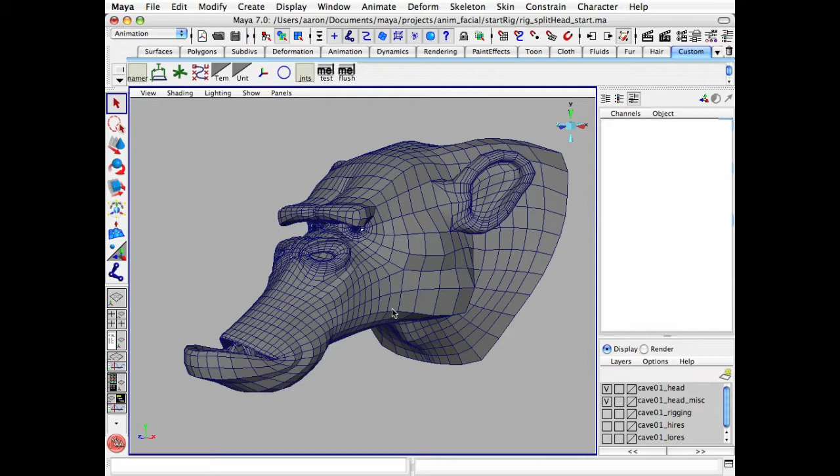So now we're going to create a series of base joints for this head rig. What I mean by that is that these joints would be used in the face rig regardless of the primary deformation system. Whether we're going to rig this face using direct controls in the face, or if we're going to rig it using blend shapes, there are a certain number of joints I'm going to use in the face to give it an underlying structure or underlying level of deformation.

What these are going to be are jaw and lip joints. For the lower jaw, lower lips, I'm going to have a series of upper lip joints so I can get some basic curling. And I'm going to have a couple of head pivots as well.

Let's switch to a side view here. Change this to template mode. I'm going to use some NURBS curves to sort of draw some guides here.

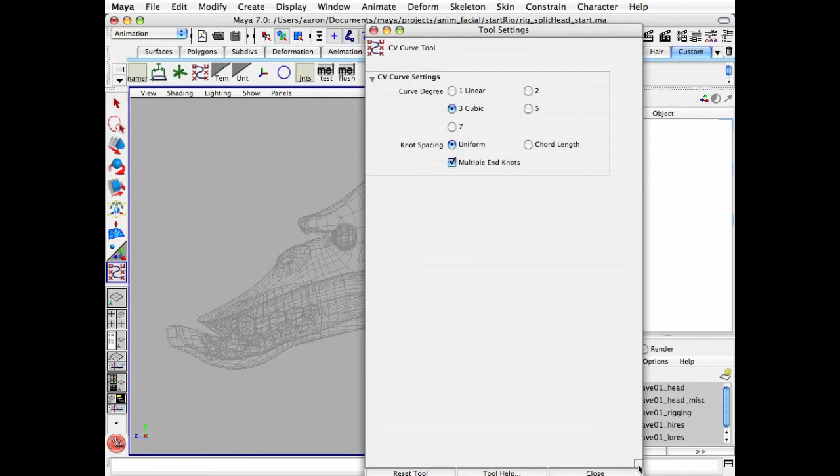Okay, so create, CV curve tool. Let's reset this. So I'm going to use a linear curve. I'm going to start at the base of the ear. Draw our first jaw joint. Rather than having a single jaw joint, since this is such a long area, I'm going to split this into a number of joints here.

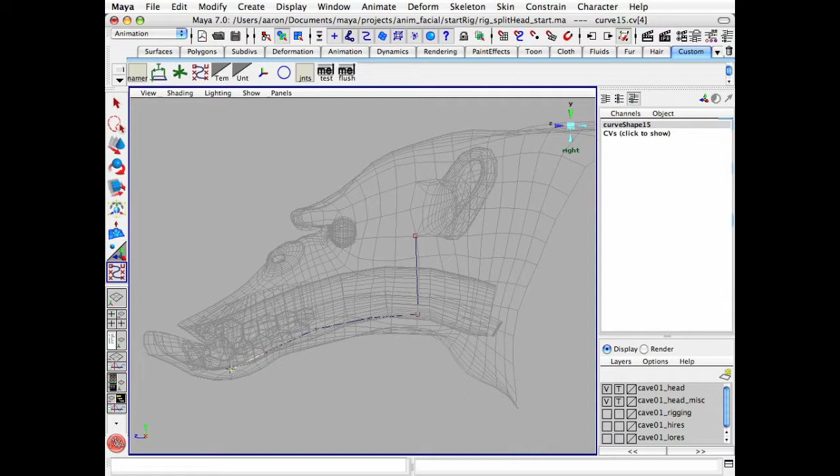Once again, I'm drawing pretty fast and loose here because I know I can go in and edit this later. Okay, so that's what I have. And next I'm going to draw a series of joints for the lip.

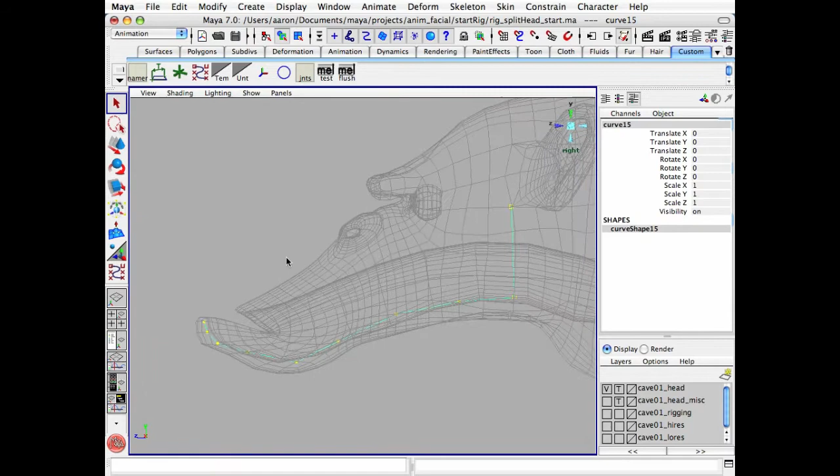These joints get more and more granular as I get to the lips, since we'll need more fine deformation toward the end of the lips here, since there will be a lot of curl in that area. Let's display our CVs. Now go into component mode and start to be a little more precise with these positionings.

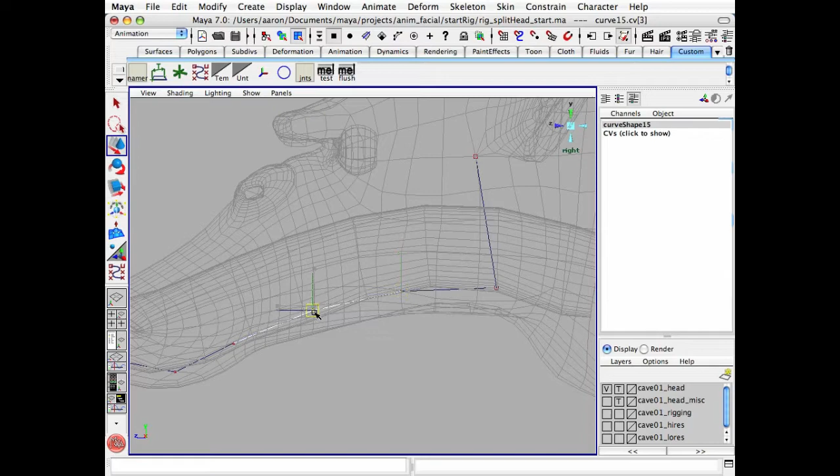Once again, rather than having a single joint, this is a pretty large lower jaw area, so I'm going to split it to give it a little more range of deformation. Once again, I got more granular as I got toward the edge of the lips.

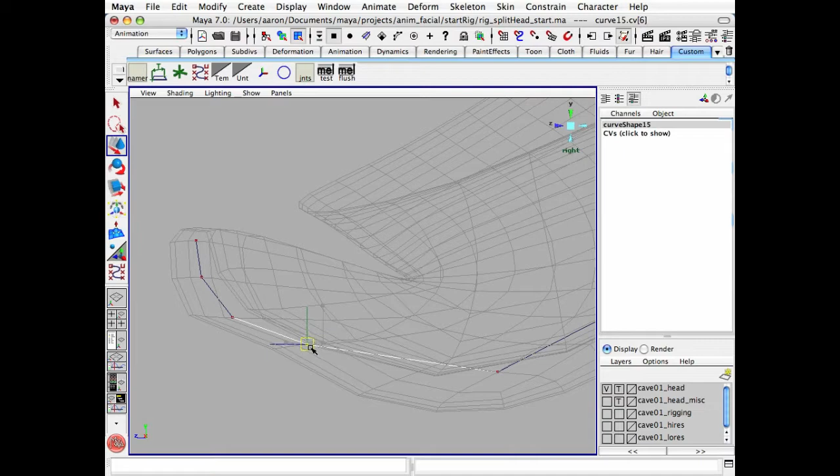Okay, I'm going to quickly name this low jaw so I'll know what it is.

I'm going to draw a similar curve starting at the bridge of the nose and going down to the end of the upper lips.

So I'm not going to have much deformation in this area. If I were, I'd just split this in two, having a joint there, having a joint here, but I'm going to keep this pretty solid for this character.

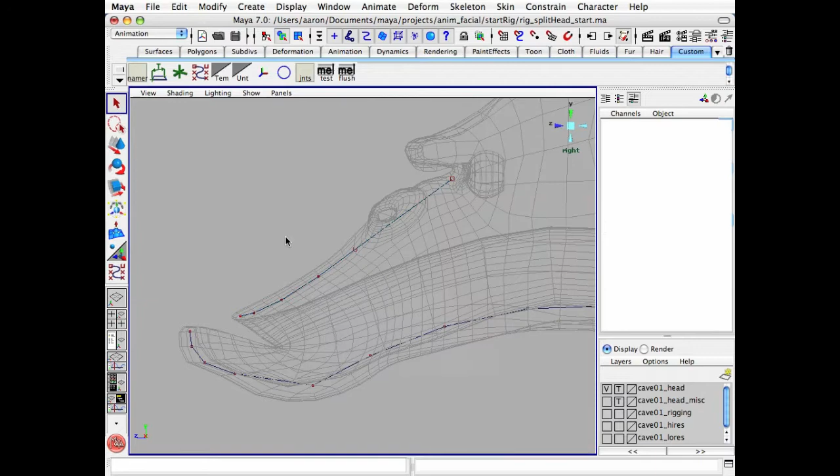Okay, display our CVs, switch to component mode. Once again, go in and refine a bit more.

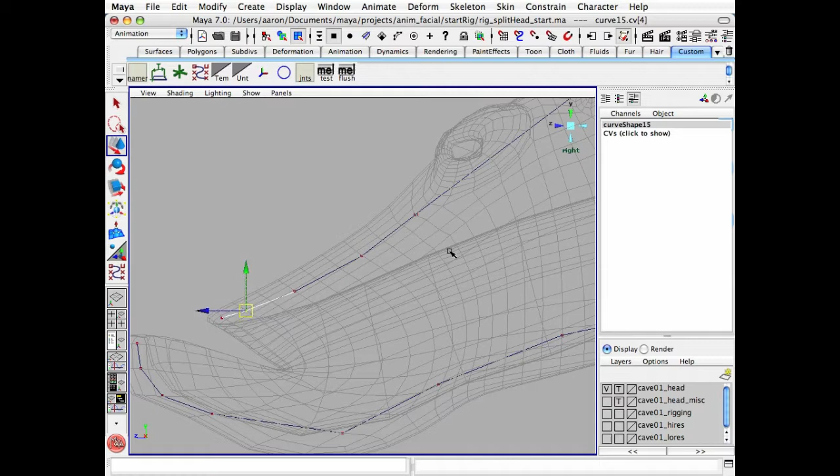We can see this cavity here, particularly toward the end. I'm trying to keep it more or less toward the center of this cavity.

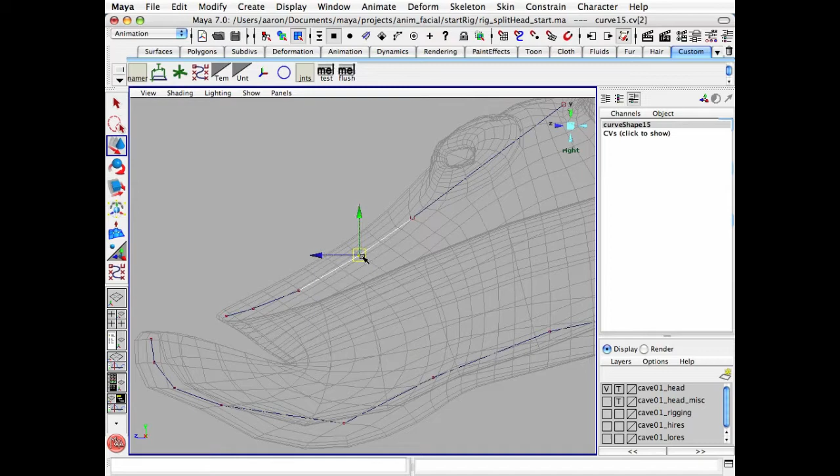Quickly rename this, just for clarity later on down the road.

Okay, so now I have my lower jaw and lip guides as well as my upper jaw and lip guides. I'm going to create 3 head pivots.

At the base of the ear, I'm going to create the main head joint, which will be a parent of both the lower jaw and the upper jaw. But the upper jaw will be a child of another joint, which will have its pivot in the same location.

And then on top of all that, we're going to have another pivot at the base of the skull, so that when he rocks his head back, we can rock it back from a pivot closer to where the base of the skull and spine would be.

On a human, they actually run pretty close to the surface of the back. I mean, you can feel your vertebrae if you touch the back of your neck. And so when you rotate your spine, it's actually rotating from a pivot much closer to the back and base of the skull than the center.

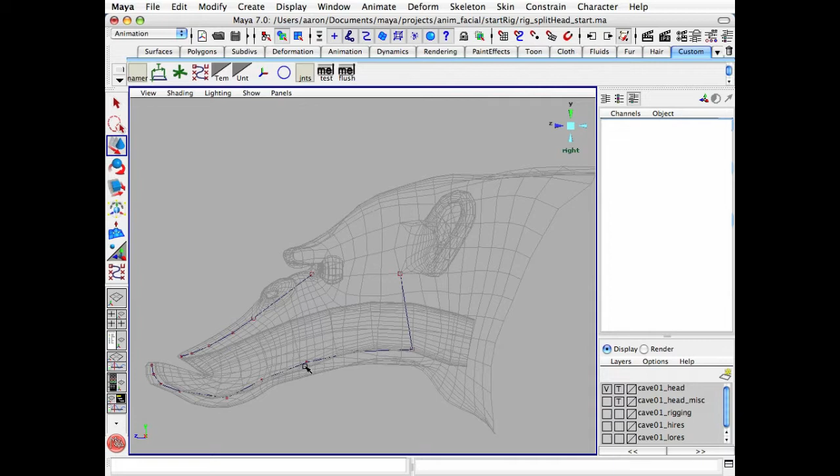Okay, for those, we're just going to create single joint nodes. Let's go in and start drawing the joints here by using just point snap. Gonna bump up the display size of my joints here. Okay, so skeleton joint tool, enable the point snap, start drawing my lower jaw joints.

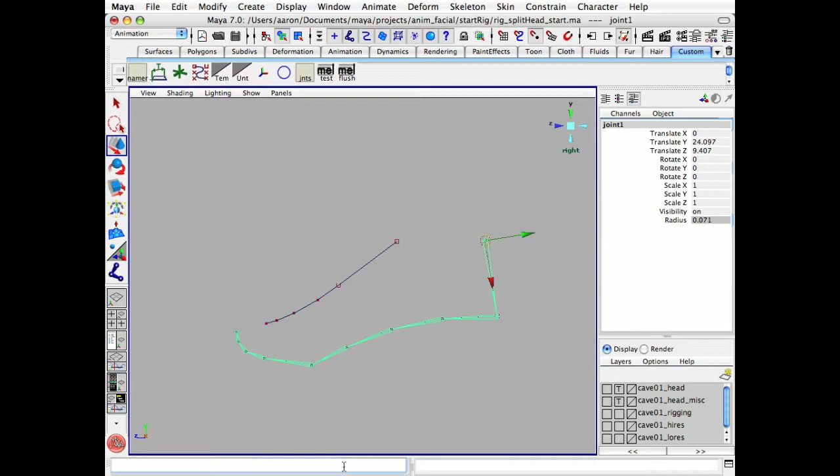Okay, so with this top joint selected, I'm going to go type in select -hi for select hierarchy. So I've selected all the joints in that hierarchy. Then display their local rotation axes. Show our handles.

Okay, so I'm going to switch to component mode and enable the question mark, which is a selection for the local rotation axis component.

I'm going to select all these, and since Y is my dominant rotation axis, first let's go back to object mode, and orient this last joint here. Once again, not a necessary step, but just to remain consistent.

So now I'm going to go in and select all these local rotation axes. Since Y is my dominant rotation axis throughout the rest of my rig, I'll keep that as a standard for the head. So I'm going to rotate this 90 degrees on X so that all the Y axes point out toward the left side of the character.

So rotate -r 90 0 0. Looks like I'm going to have to rotate this one -90. Okay, so all these Y axes are aligned.

Go back and do some renaming. So modify, search and replace names. Let me reset this. So I've selected the top joint and I have the hierarchy selection option selected. So I'm going to replace every instance of joint with standard naming convention.

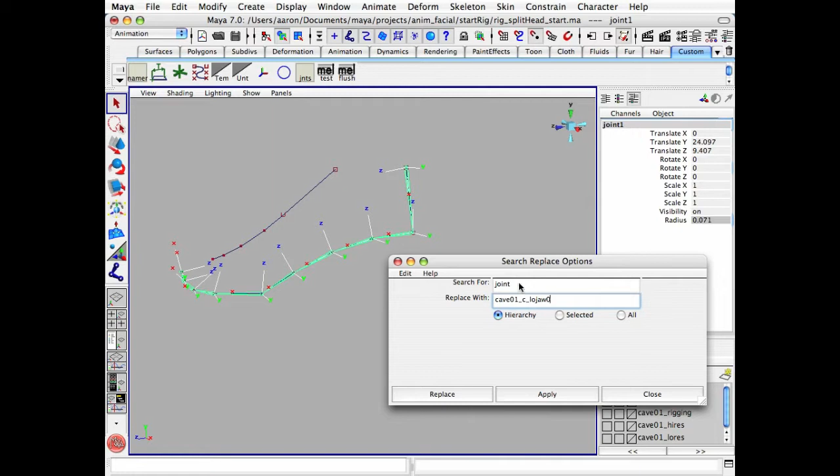Okay, then go in and add JNT to each of these. Switch back to a side view. Then create our upper jaw joints, once again using the point snap.

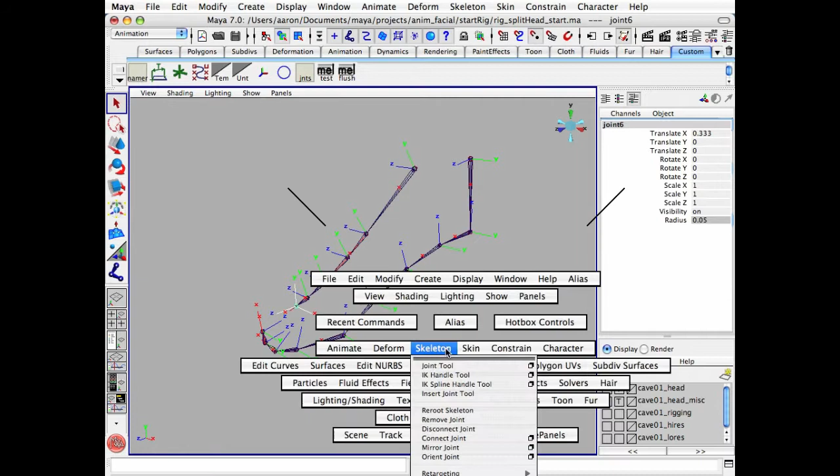Let's select hierarchy command once again and display the local rotation axes. So here I'm going to, first of all, orient my end joint. But here I'm going to orient all of my local rotation axes so that Y is the dominant rotation axis.

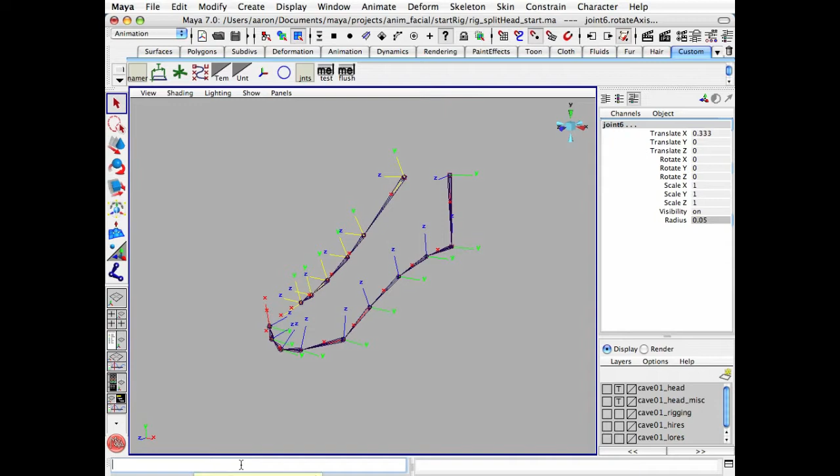What I'm going to do, just for ease of animation, is orient my Y axes on the upper jaw and lip joints so that they're in the opposite direction of the lower jaw and lip joints. Okay, so we'll rotate these -90 in X, so rotate -r -90 0 0.

The effect of this is, since their Y axes are opposite one another, if I wanted to simply open the mouth, I can hinge them in opposite directions. Same is true for the lips.

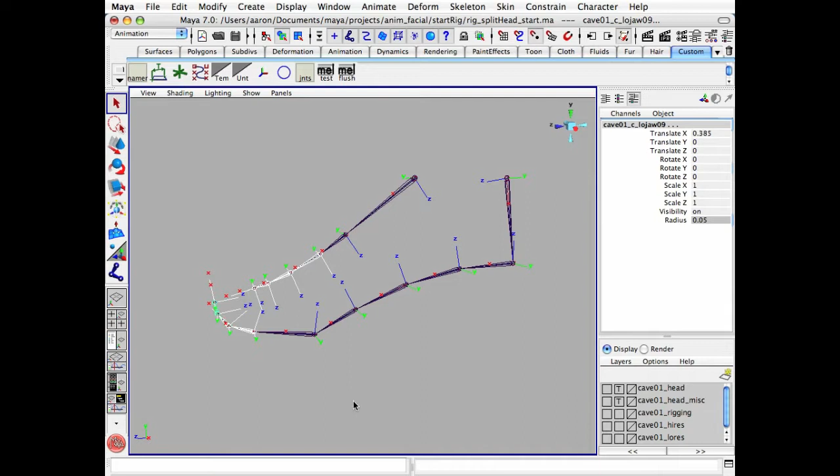If I were going to go in and select the last three upper and lower lip joints and rotate them in Y, I can curl the lips in and out in an opposing direction.

Once again, you can orient these as you choose, basically whatever you think will help you with the animation of your character. But I like hinging this so that they rotate opposite one another. Let's do some quick renaming.

Once again, we go in and add JNT to all of these joints. Except for the end joints, we actually want to add an END suffix, because we really don't need to skin to these joints. Whereas anything with a JNT suffix, we're going to skin to.

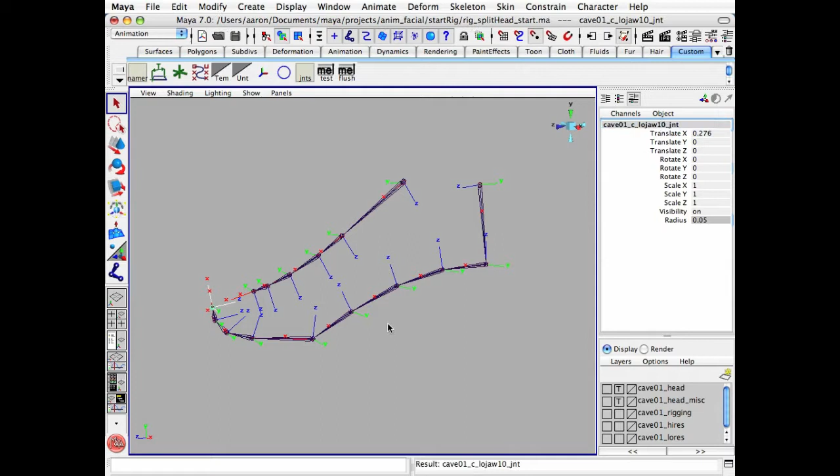Okay, so we have our lower jaw and lips. We'd actually want to rename these lips, low lip. And from here down, we'll go up lip.

We'll have the same number of lip joints on both the top and bottom. Just gonna name a few of them here. Okay, I'm gonna switch back to a side view.

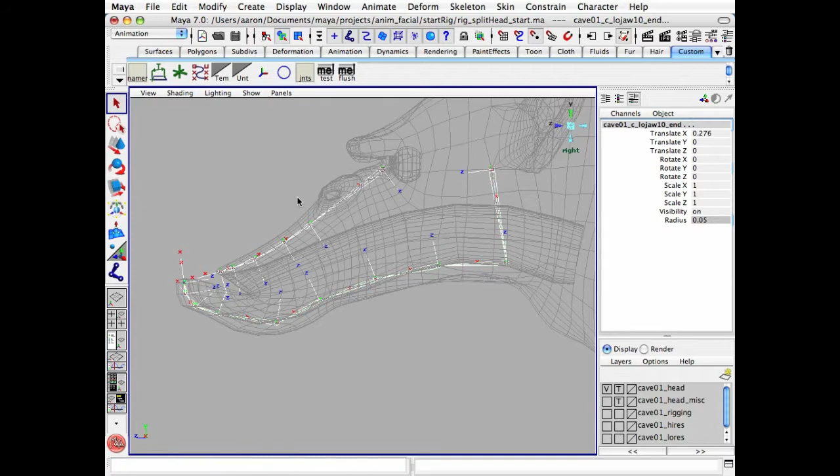Select both of the top joints and select hierarchy once again, so I can turn off the display of the local rotation axes. Okay, so now we're going to create our head joints.

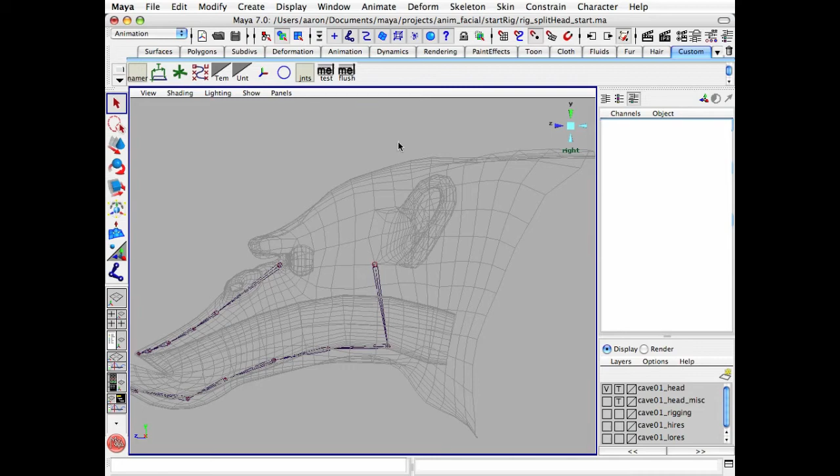Once again, we're going to have two pivots, one right on top of each other, right at the base of the ear here. Then another pivot at the base of the skull, where the spine, which would be running closer toward the back, would meet with the skull, and we'd have a rotation which is a little more anatomically correct. It will help with the deformations when we rock the head back.

And then just duplicate that. So edit, duplicate, call this head 2. I'm sorry, head 3.

And then create one more head joint toward the base of the neck here. Okay, this is going to be head 1 actually.

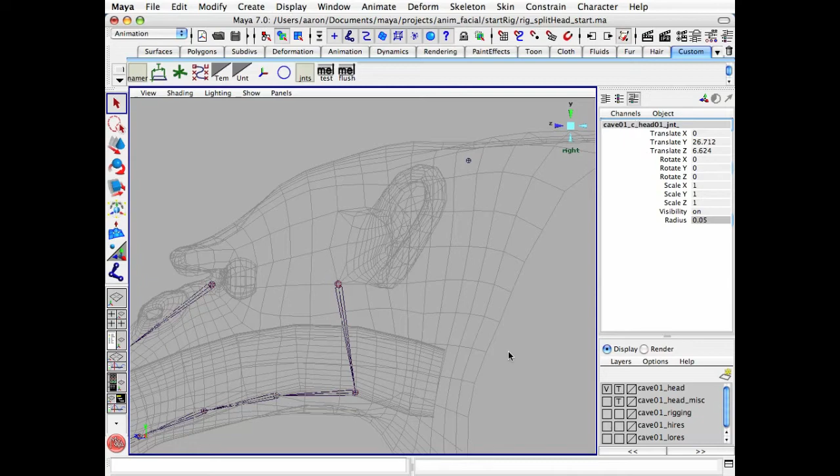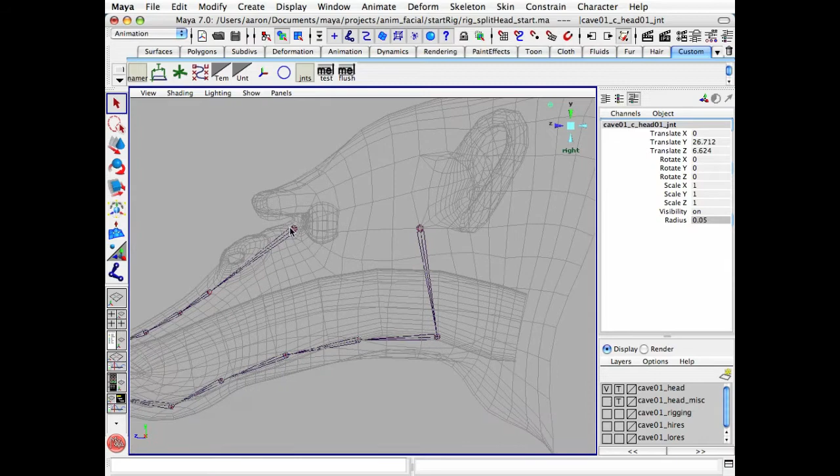Let's find this first head 1 and rename this to head 2. So in terms of hierarchy, this will obviously be the first head joint, and everything else will be a child of that. We're going to want to be able to move both the upper and lower jaw joints together as well as separately. So that's why we've created the two head joints at the same pivot spot.

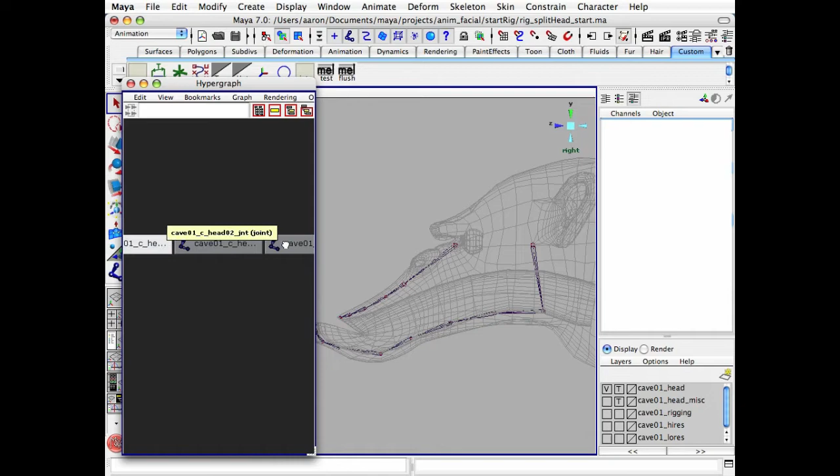Let's create this base hierarchy first. So I'm going to parent head 2 to head 1. This results in this pivot. Then we're going to parent head 3 to head 2.

Before we move forward, I'm going to select each of these because their local rotation axes are world based. Do some quick reorientation so that their Y's are rotated 180 degrees or 90 degrees on Z.

So rotate minus R 0, 0, 90. There we go. Let's get this last one here.

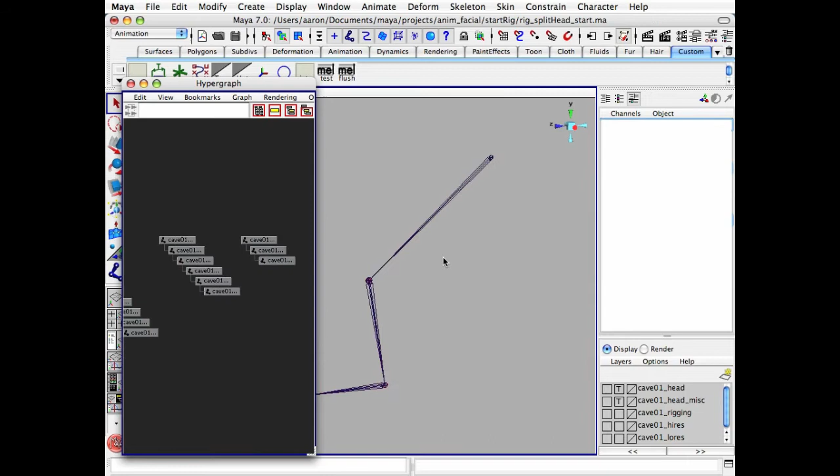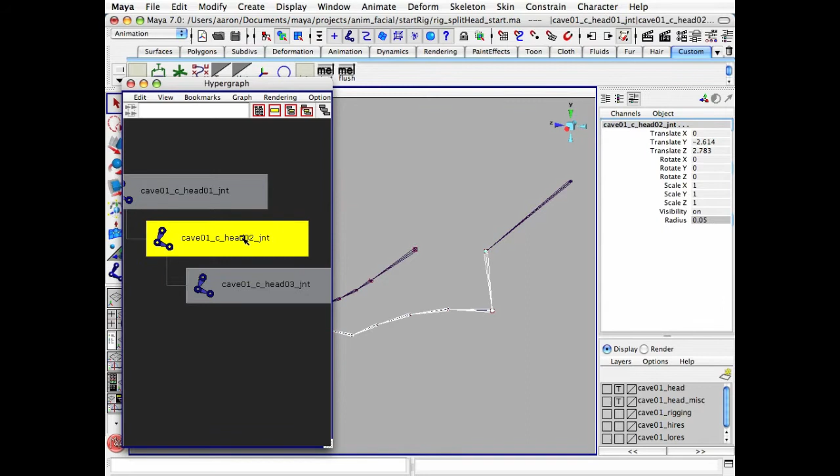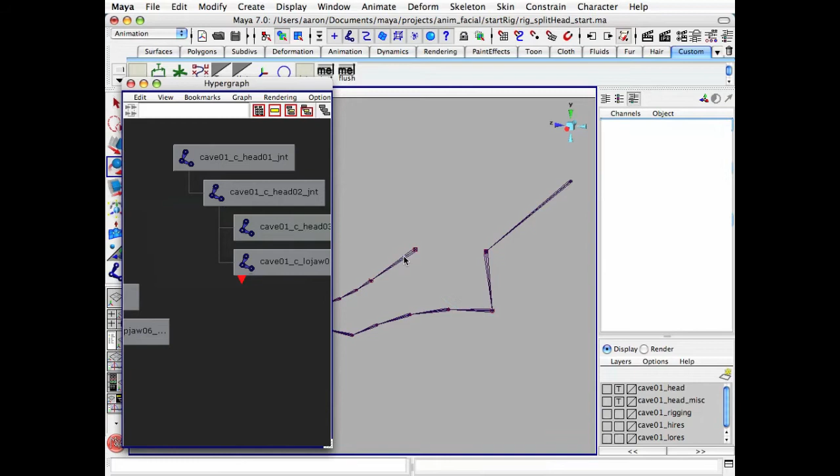Okay, so now we have this basic head hierarchy here with the three head joints. We want to be able to rotate both of these joints in unison as well as separately. So we're going to do that by first parenting the lower jaw joints to head 2. Now when we rotate head 2, it rotates the lower jaw joints along with it. If we move up to head 3, the lower jaw joints are not a child, they're on the same level as head 3.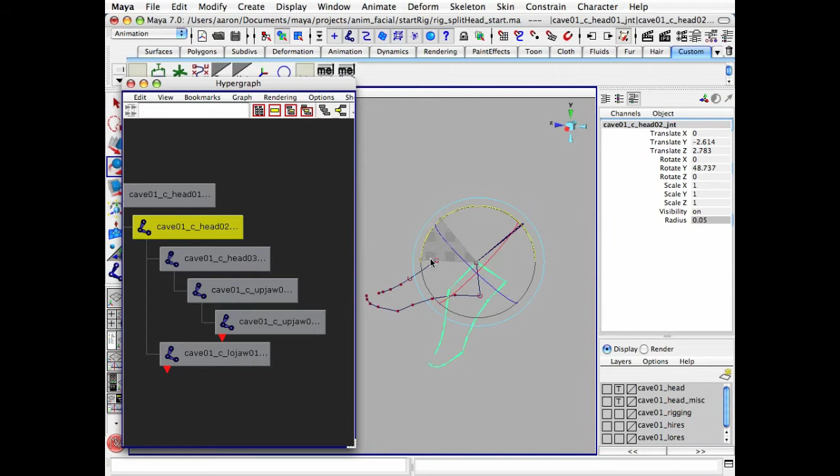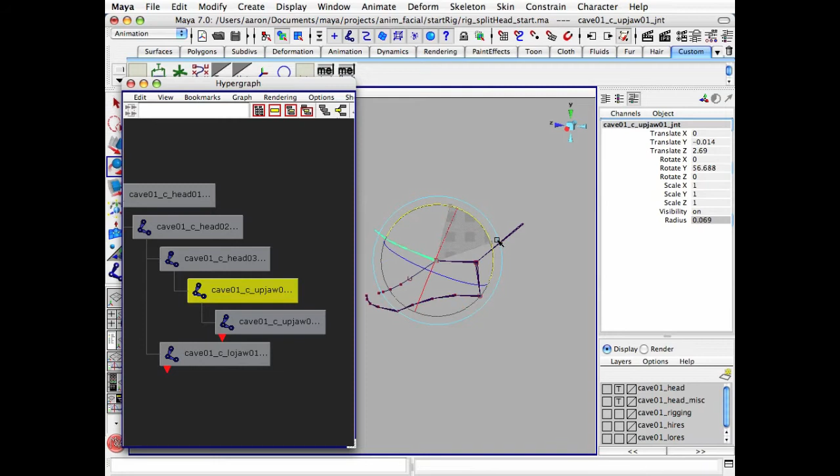So we're going to parent the upper jaw to head 3. So now what we have is the base of the skull, a global pivot for the head at the base of the ear, where we can get both the upper and lower jaw. We have a separate pivot for our lower jaw, separate pivot for our upper head, so that way we can get maximal jaw extension. And then another pivot for our upper jaw and lips. There we've created a number of hierarchical pivots for this head rig. So these are our basic joints. Regardless of what system we're using, these are joints that we will either layer direct deforms on top of, or blend shapes.

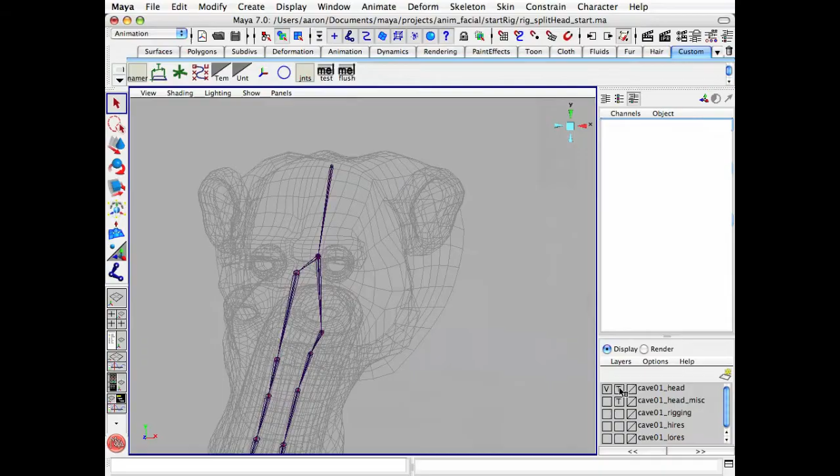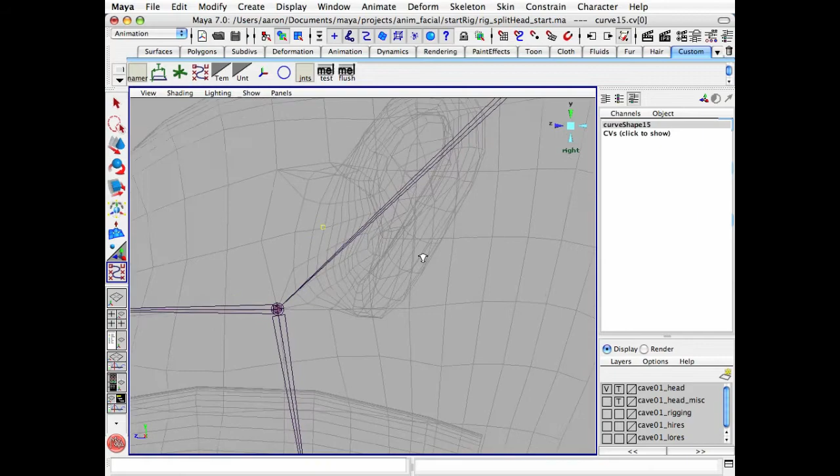Another thing I'm going to do here is add ear joints. That's something that you, in all likelihood, want to handle with joint deformations and not using clusters or blend shapes. So for this I'm going to switch back to a side view, go back to template mode. We're going to use our NURBS curve once again as a guide. Okay, so start there, switch to a top view, go to the base of the ear.

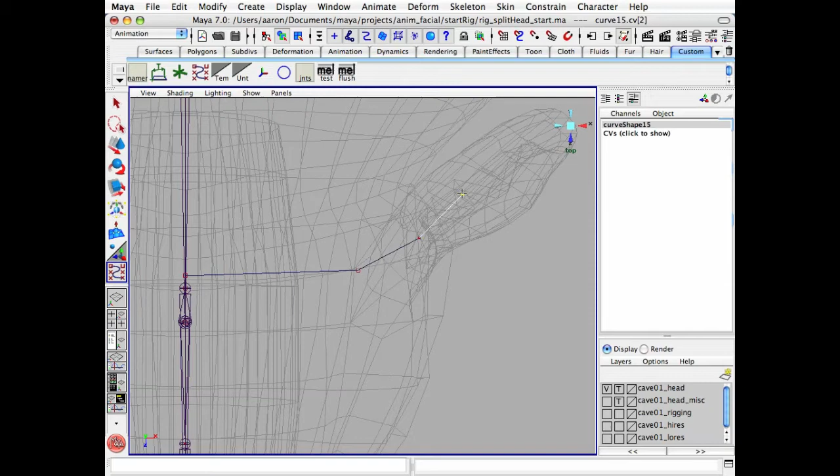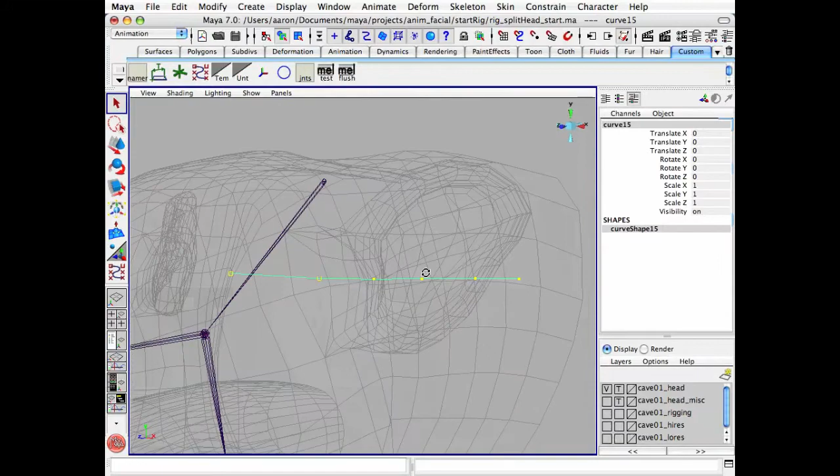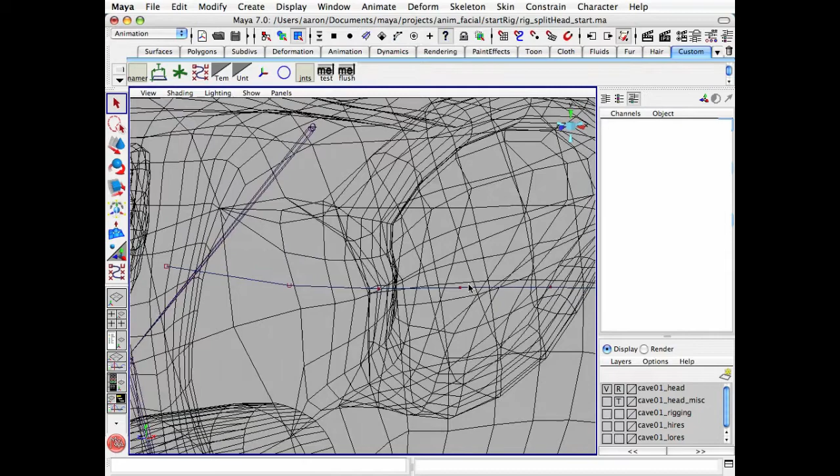Okay, so I'm going to create three joints in the ear here. Again, these are very rough, so I'm going to use point snap to snap them onto the edge of the ear here, and then just manually move them in. So switching to component mode and activating point snap once again, I'm going to select this ear joint here. Let's go back to CV component mode. I'm just going to snap these, march down the ear here. And here's the end.

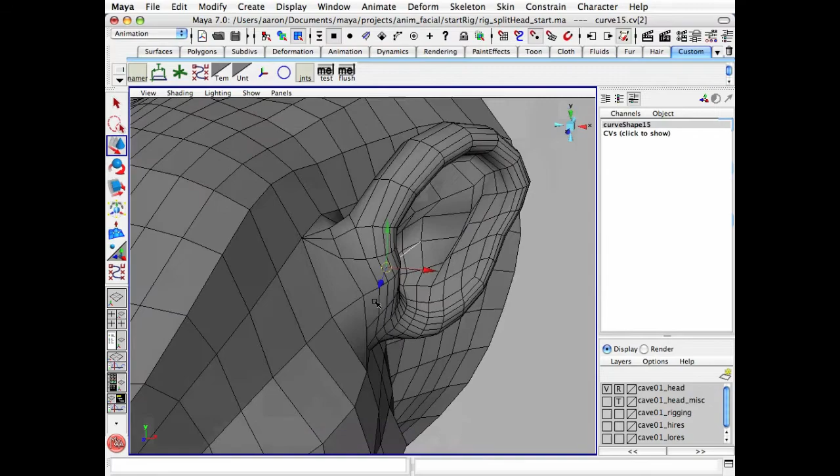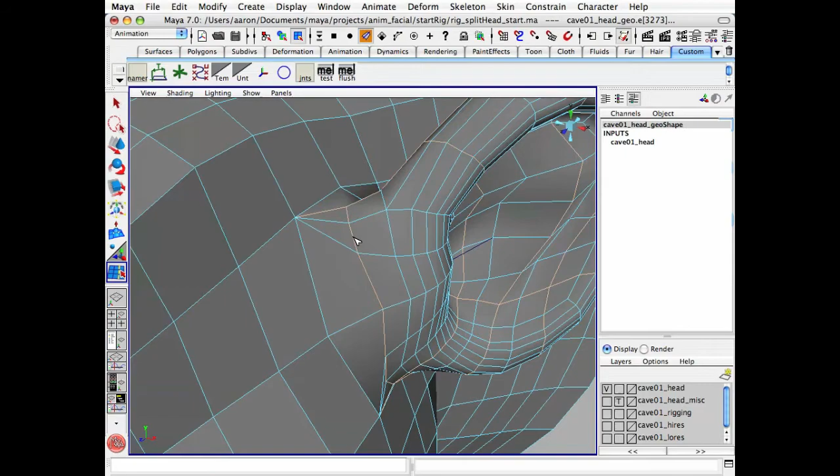For this, I'm going to use an edge loop selection so that it's centered along this edge. Then the next one in, I'm going to center it along this ring here. Okay, switching back to object mode. Let's pick our edge loop selection here. Well, not quite what we want. Well, it looks like this might be easier just to select manually, so I'm going to switch out of that mode and switch to just vertex selection mode. Actually, I'll just paint selections.

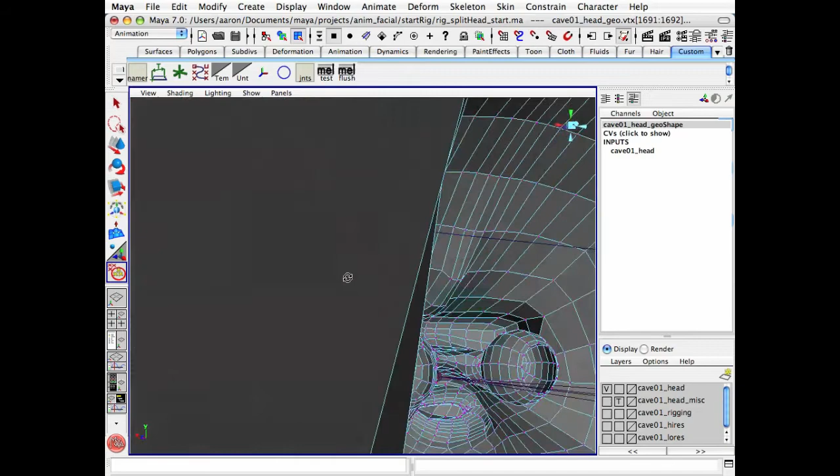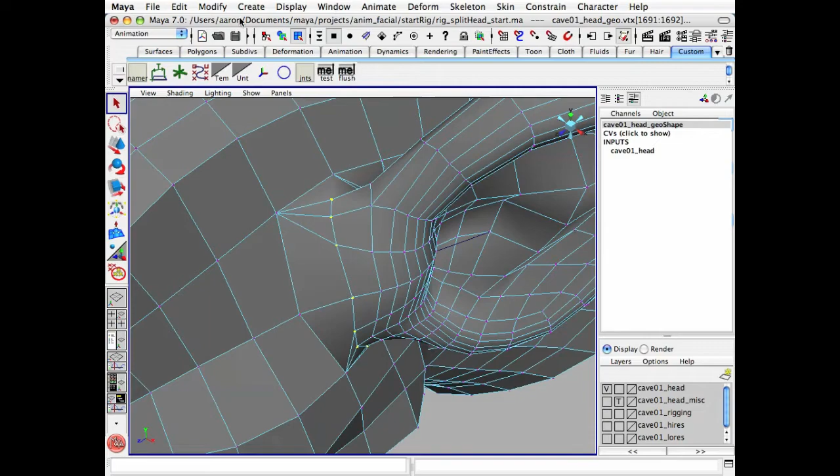Okay, so there I've selected this ring of vertices here. I'll create a cluster out of that, so: deform, create cluster. I'm going to select another edge loop here. Once again, I'll just go in and manually select these. These will be the very base of the ear. Okay, create one more cluster.

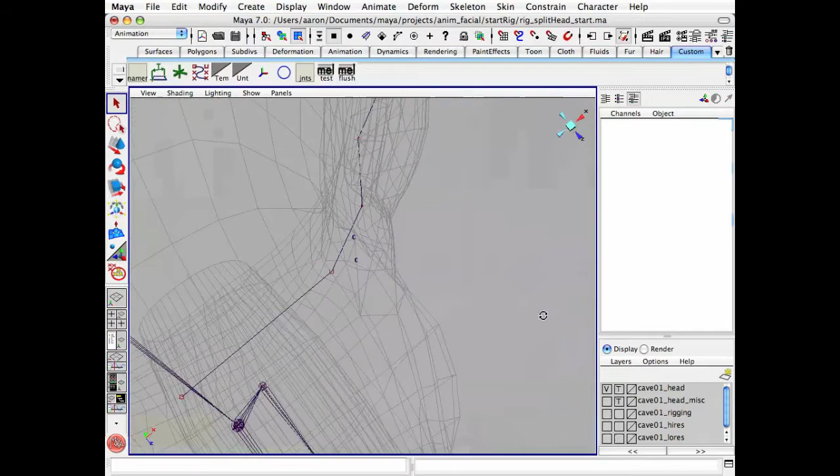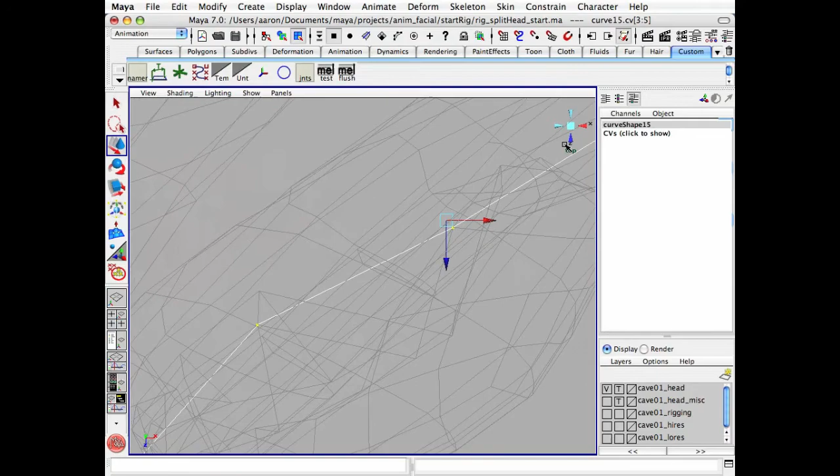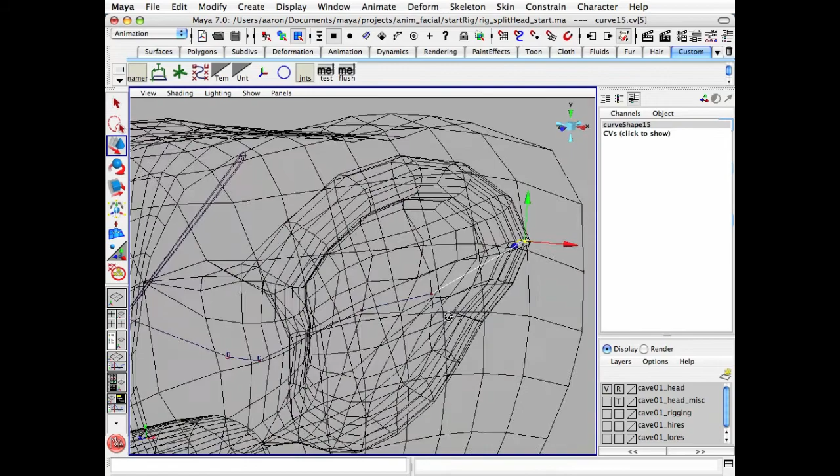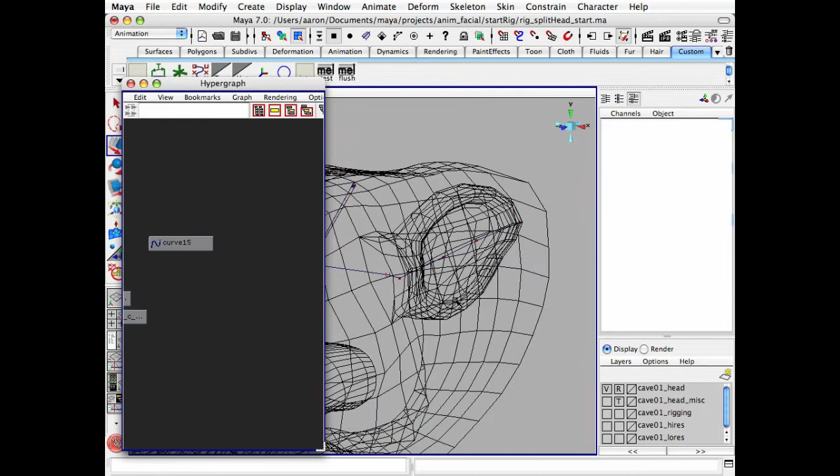Okay, now I'm going to go in and reactivate point snap and snap these CVs to these two new clusters. Turning off point snap, I'm going to select these, go to the top view. Let's move these into the center of the ear mass just a bit. I'm going to make an adjustment on this inner ear here. Okay, so here's our ear. And get rid of these clusters.

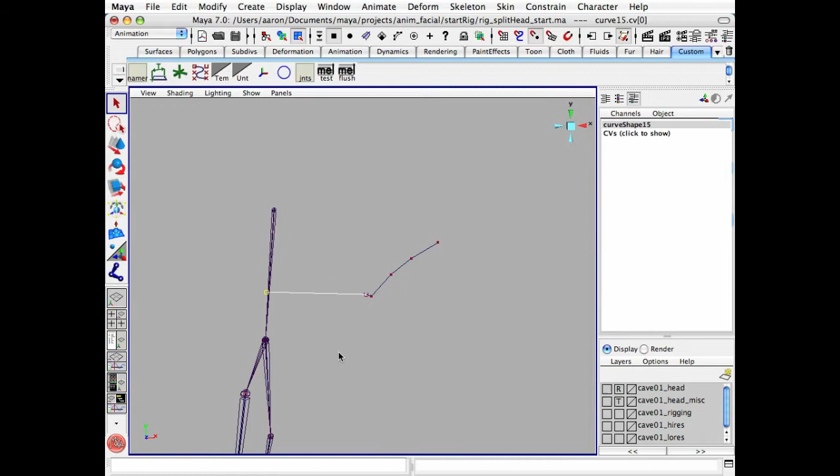Now let's switch to a top view here and draw another joint chain, with point snap activated. Yep, try that one more time. Okay, finally got that right.

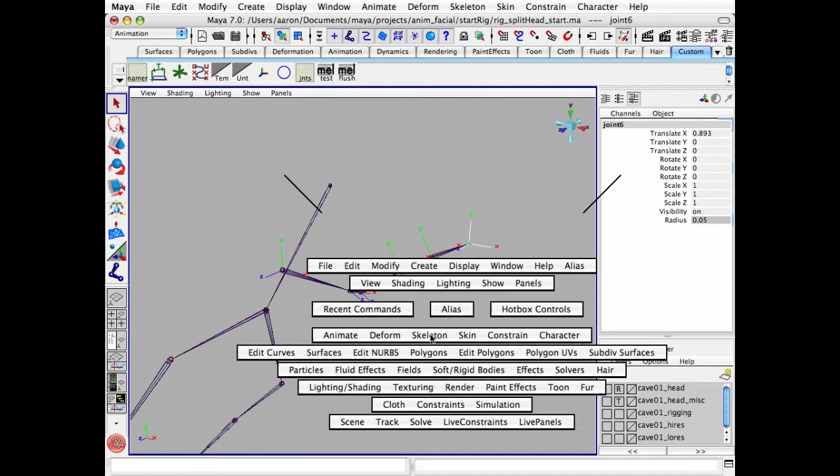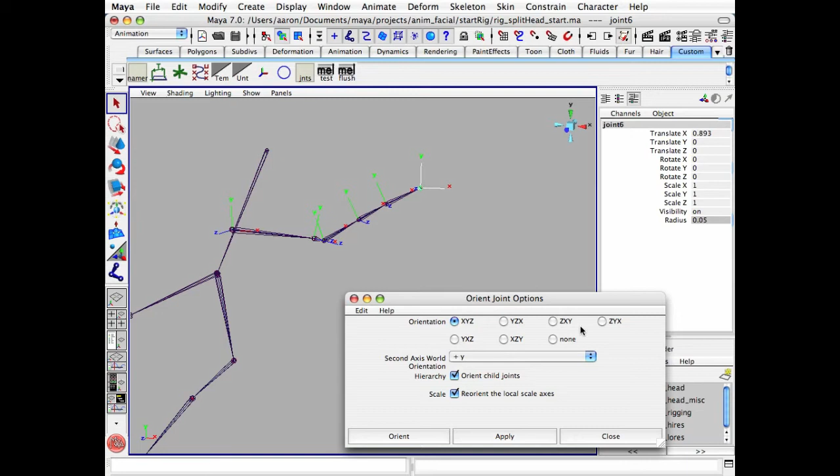So let me select hierarchy, display the local rotation axes once again, and orient this end joint. So what I'm doing for this is selecting skeleton, orient joint, and option box. Let me reset this. What this does is it will orient a joint relative to its parent. Unfortunately, I skipped this earlier on, I just breezed through it, assuming the previous DVDs have been watched. So what this tool does is orient a joint based on its parent. When I set this to none, what I'm saying is relative to its parent, it will have no orientation offset, or in essence, it will match the orientation of its parent. So I've set this to none, I hit orient, and it pops that joint to match the orientation of its parent.

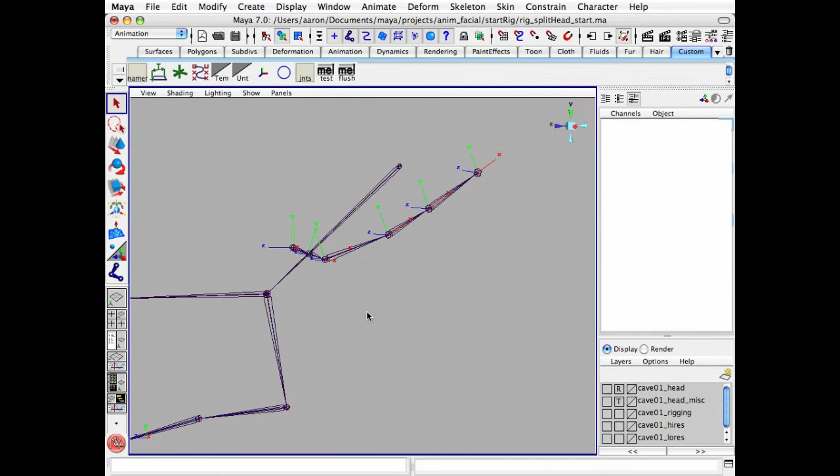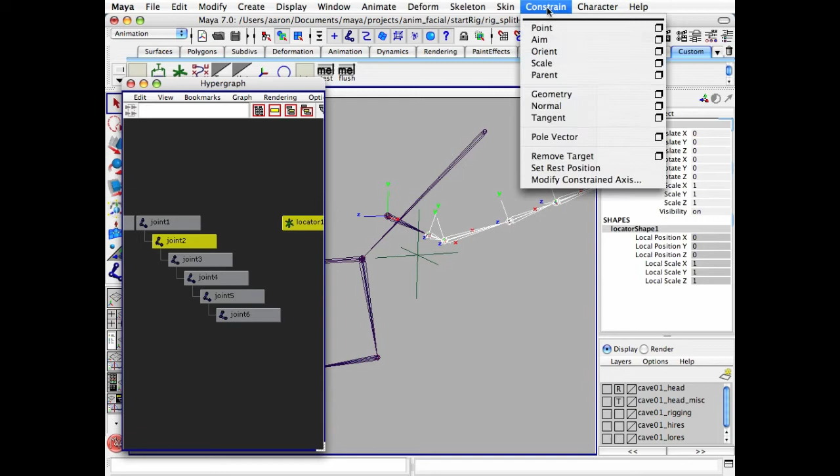Okay, there's one adjustment I'm going to make here. I'm going to show locators and create a locator real quickly. I'm going to move this locator up to this joint here, just using a point constraint. I'm only going to do that so I can use the locator as a visual guide to roughly match the orientation. We're not going to be doing that much rotation from this joint. Okay, so let's select this local rotation axis and switch to a side view.

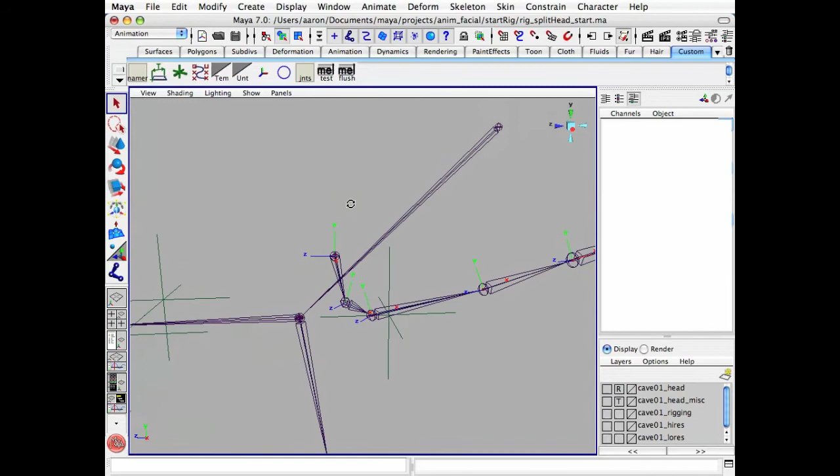Actually, this original orientation might work out better. All these orientations actually look pretty good. Since I see the in and out curl as the dominant rotation for this ear, I think with the y-axis pointing upward, that can work out just fine for these ears.

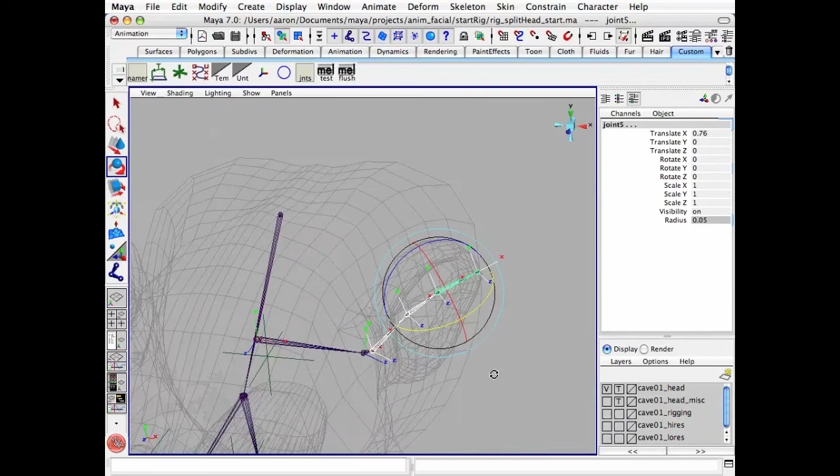We only need a few joints. We don't need that much deformation here. With this number of joints, that should be plenty of deformation for the ears.

I'm going to select hi once again. What I'm doing is clicking in the command line editor, and it stores a history of commands that you've typed in there. So by hitting the arrow, you can cycle through commands that you've previously typed in.

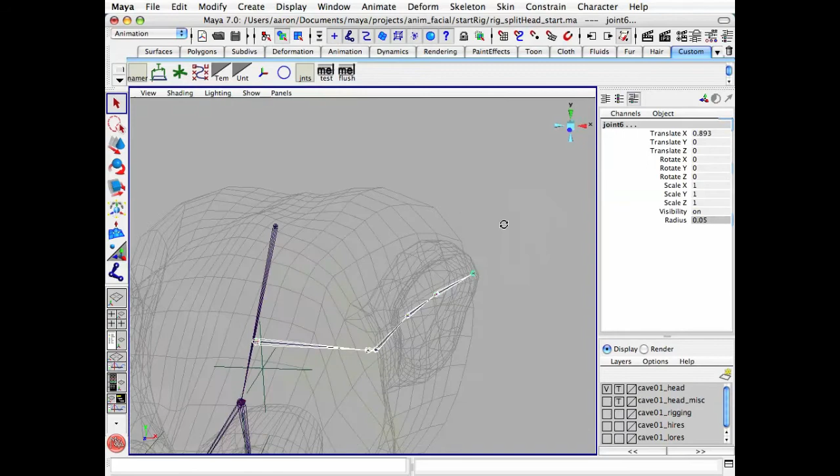I'm going to select hierarchy once again and hide my local rotation axes. And then rename these. Okay, so every instance of joint, so here's going to be the L ear.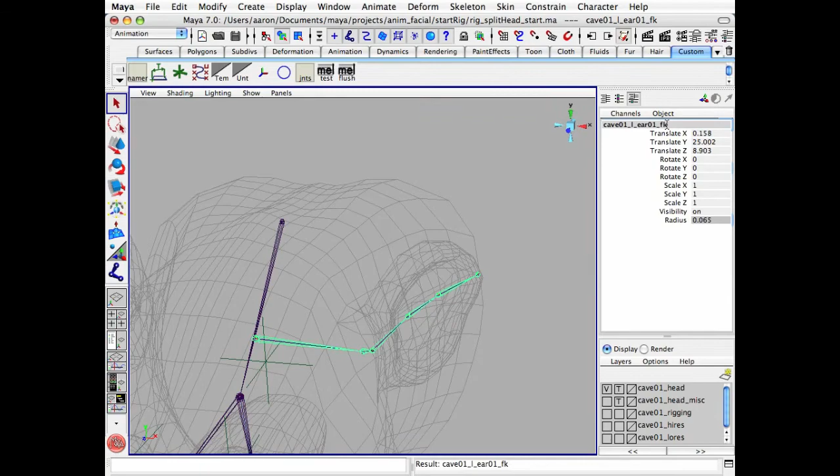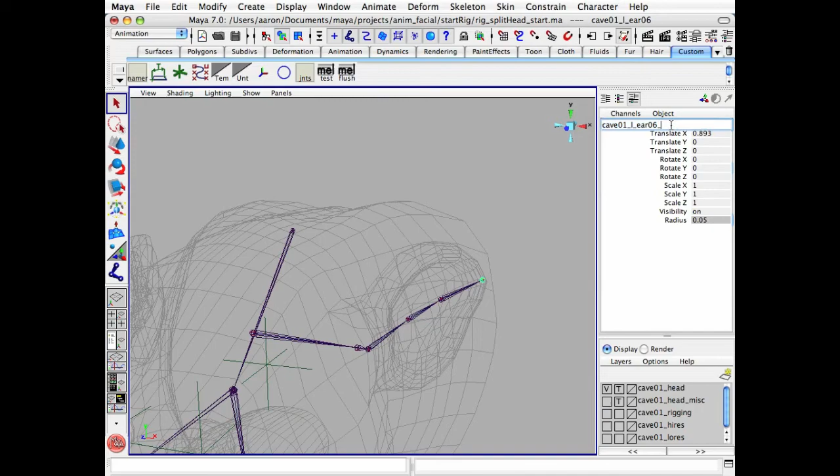This first joint I'm going to give an FK suffix, since we're not really going to skin to that, but we will skin to all the other joints, so we'll give them a JNT suffix. All except for the last joint, which will get an END suffix, since it's not really necessary to ever skin to the end joint. Sometimes you can find that useful if you're doing some translation on X or scaling, but typically there's no reason to skin to the end joint, so we'll just name it so that it's not selected when it's skinned.

So now I'm going to mirror this left ear across to the right side. With the first ear joint selected, I'm going to select skeleton, mirror joint, and option box. Let's reset this.

So as we can see here, the YZ plane cuts down the center of the character's face. So there's the YZ plane defined by those two axes. We're going to mirror across that plane from the left to the right.

We're going to leave the mirror function on behavior. What that means is it will actually flip one of the axes 180 degrees so that when we select both ears, they'll mirror each other in behavior. So if I rotate this upward, the other joint will, in a mirrored fashion, rotate upwards as well. That's what we get with the behavior.

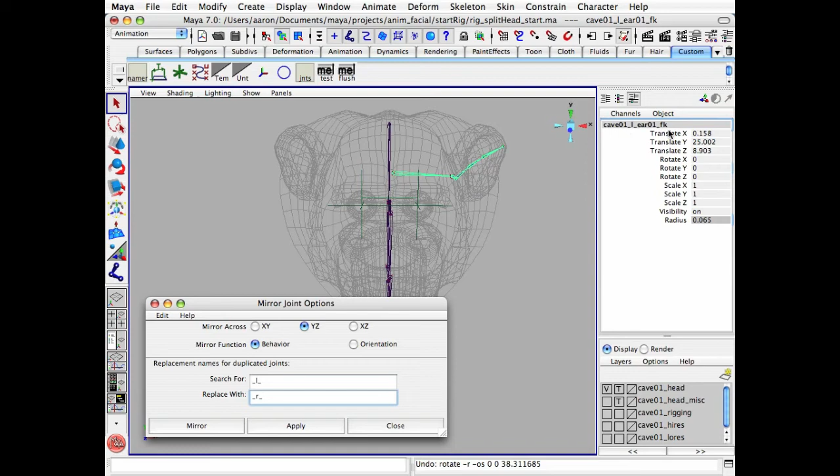I'm going to search for underscore L underscore left side and replace it with underscore R underscore. So it will rename the side token in our name here. If I hit mirror, so now we have right side ear joints.

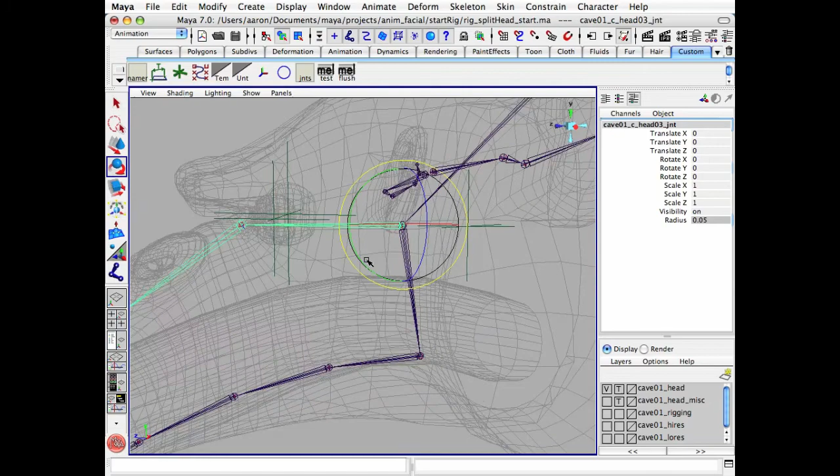So I'm going to parent these into the main head rotation. When I rotate this head 3, I'm really going to want my ears to stay in place. I'm going to want them more a deformation related to this head 1. So I'm going to select both these ear joints, shift select head 1, and parent them.

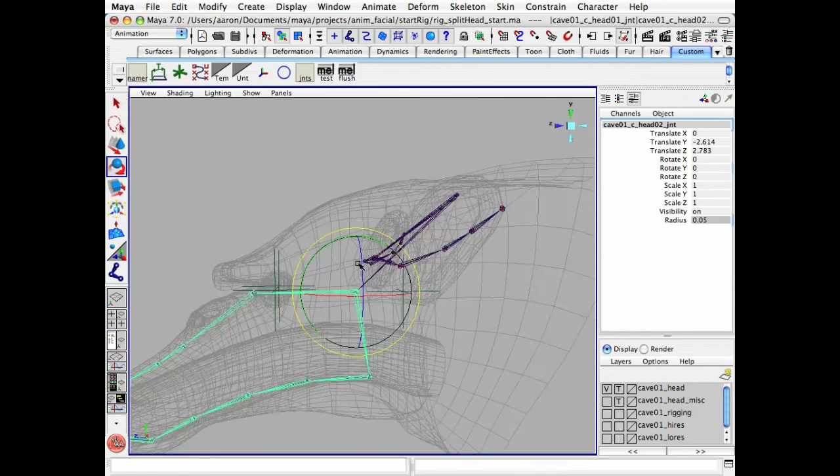So now when we rotate head 1, it's moving everything. Step down to head 2, and it will leave the ears behind.

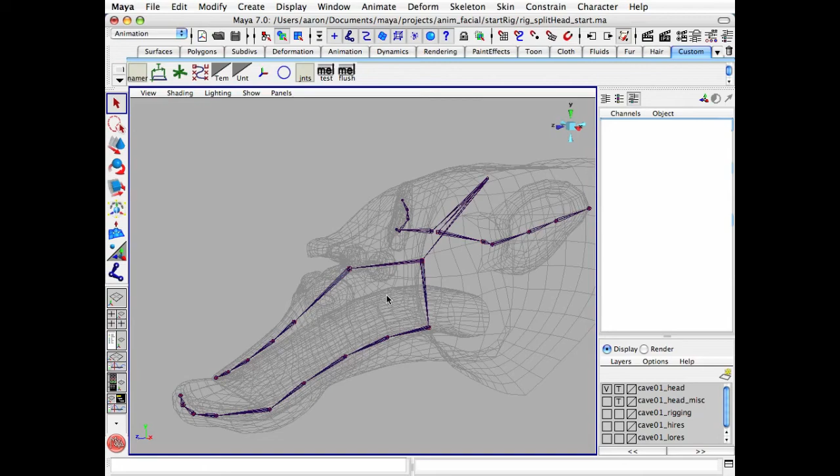Once again, this whole hierarchy is flexible depending upon your character designs and the type of deformations you see with your character. One thing that you shouldn't be afraid to do is to experiment with the hierarchy. You may build this and decide later on that maybe you want the ears parented to the lower jaw. It's something that you can do a rough skin, test it out, unskin it, and change the hierarchy. Or even when it's skinned, there's nothing to stop you from just reparenting these to a different joint.

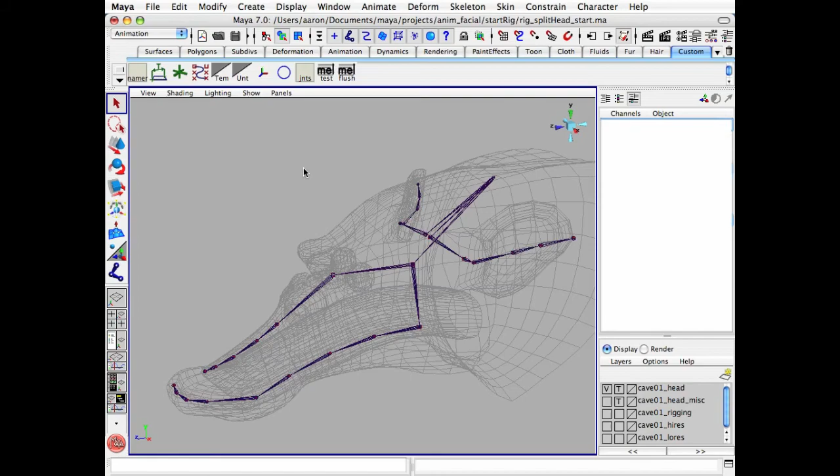Okay, so here we have all of our basic joints built. We have a base skull rotation. We have a center head rotation that will move all of the upper and lower jaw. A child of that is we have a separate lower jaw and lip rotation, an upper head rotation. So with the combination of these two joints, we can get a very broad mouth rotation.

The same is true with the general jaw joints. They're opposite one another. We can get a pretty broad mouth rotation here for both the jaw as well as the lip joints. And then we have our ears.

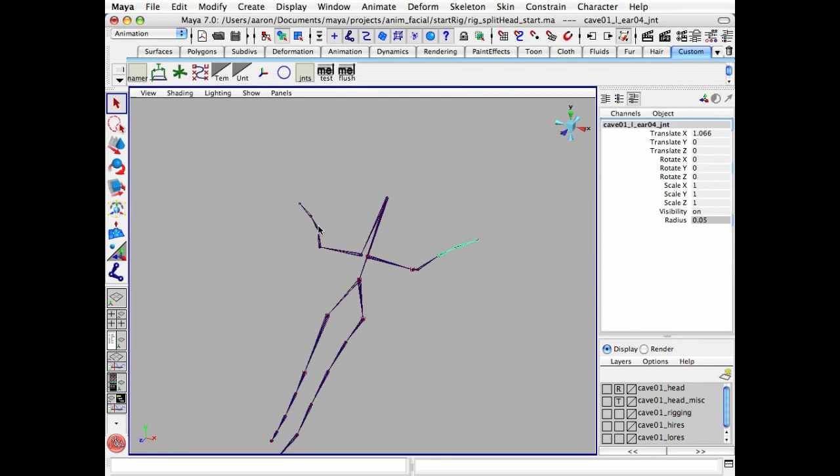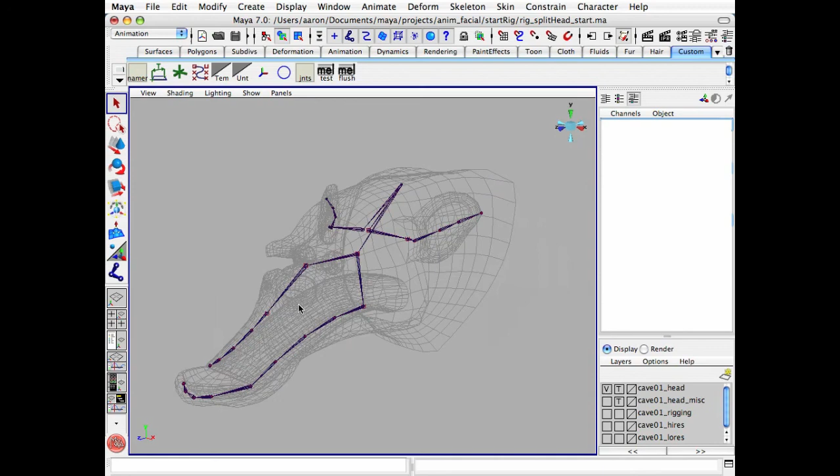So once again, regardless of direct deformers or blend shapes, these basic joints here will allow us to add in a base level of deformations, and we can then build either system of deformation on top of that, either the direct deformers or the blend shapes. But these are the typical joints that I'll start with for a standard human or humanoid face.

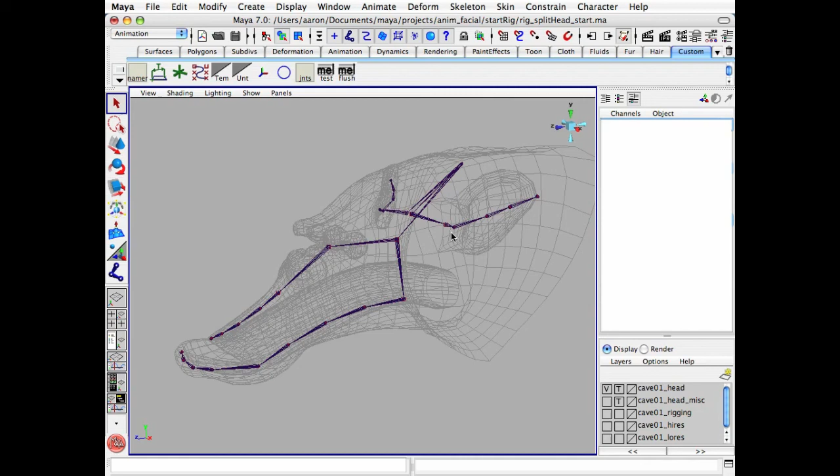Lower jaw, upper jaw, a double hinged head so that we can move the upper and lower jaw and lips together, as well as hinge the upper jaw separate of the lower jaw. I'll have a base skull joint, and then the ears.

Okay, so now we've built our joints, our base joints, built our base hierarchy, and now we're going to move into just smooth skinning this, and then we'll have the foundation upon which we'll build both the direct deformers and then the blend shapes.